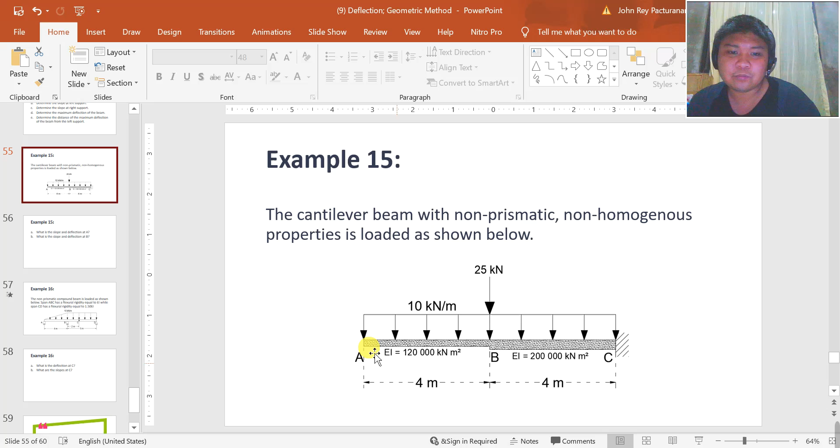So what are the questions here? There are only two questions. Letter A, what is the slope and deflection at point A, which is the free end of the beam? And letter B, what is the slope and deflection at B?

So let's begin discussing the solution. Here in OneNote, I already solved this one because if I don't have a prepared solution, this video might take a while. However, I am trying my best to discuss it in a way that you can understand it even though the solution is already presented.

So the first thing we'll do here, if you remember, we already solved this problem using the moment area theorem - that was example number 8. Last time, we modified the moment diagram because we have different flexural rigidity. So actually, we will do the same thing here.

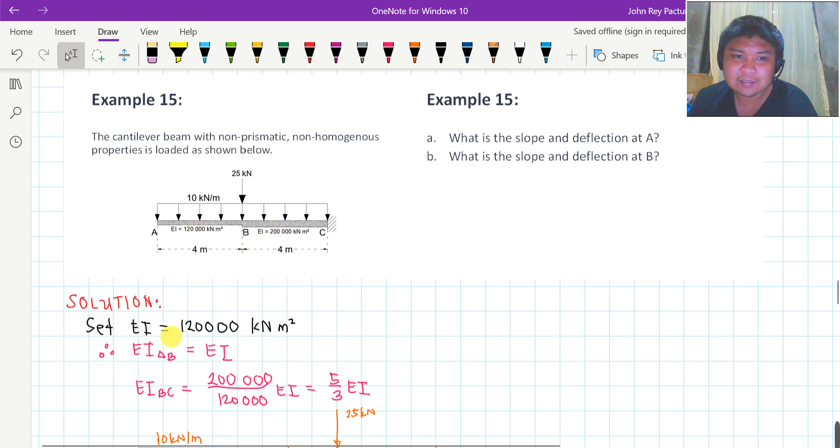So set EI equals 120,000. Therefore, for AB, since its EI is 120,000, the EI of AB is simply EI. However, for the case of BC, it has a flexural rigidity of 200,000. So therefore, the flexural rigidity EI of BC is 200,000 over 120,000 EI, or simply 5 over 3 EI.

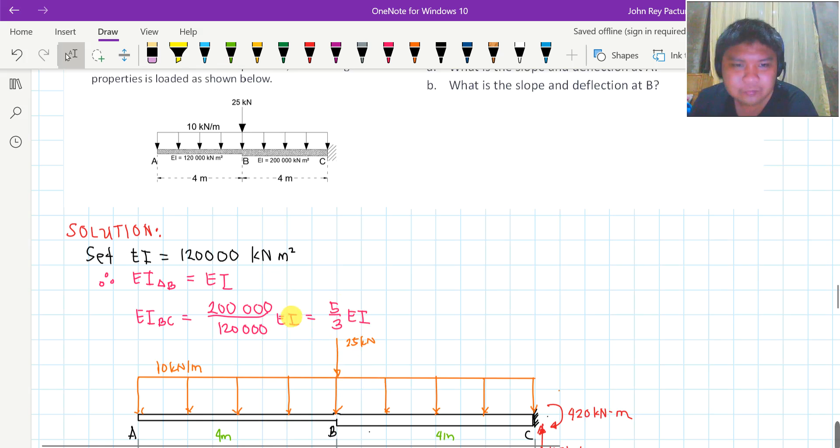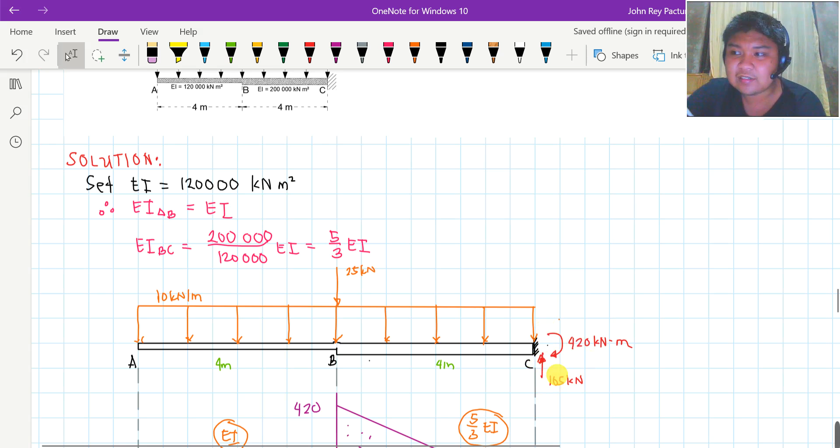Next, this is our original beam. I already computed the reactions - we have 105 kN here and 420 kN meter there. So what will happen here, let's draw first the moment diagram by parts.

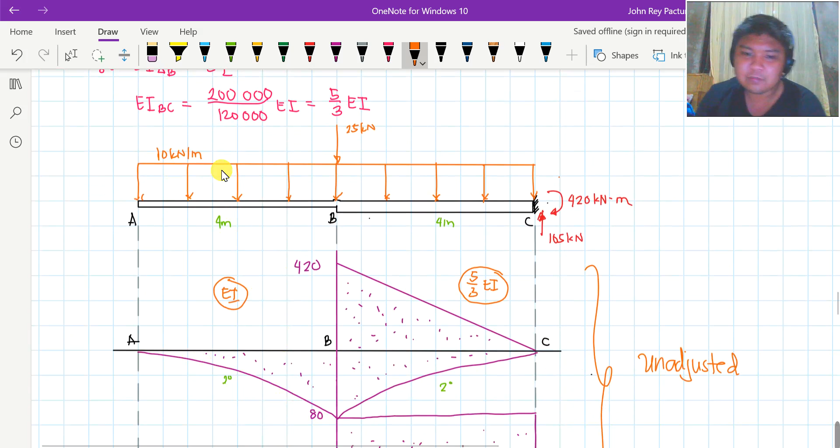So this will be a second degree curve because of the distributed load. If you want to verify that it's 80, that is simply 10 times 4, multiplied by 1/2 of 4. So that is 80, second degree. By the way, I'm not placing a negative sign on this because we're discussing the conjugate beam method.

Next to be considered is the 105 kN force. So 105 times 4 equals 420, and this will become a triangle or first degree curve. I forgot to place the degree label for this, but it's understood that it's first degree.

For this distributed load again, of course, 10 times 4 then 1/2 of 4 again. So that's 80 again. And lastly, for this moment reaction, I won't repeat it - this is a negative moment because it's to the right of B and at the same time it's clockwise.

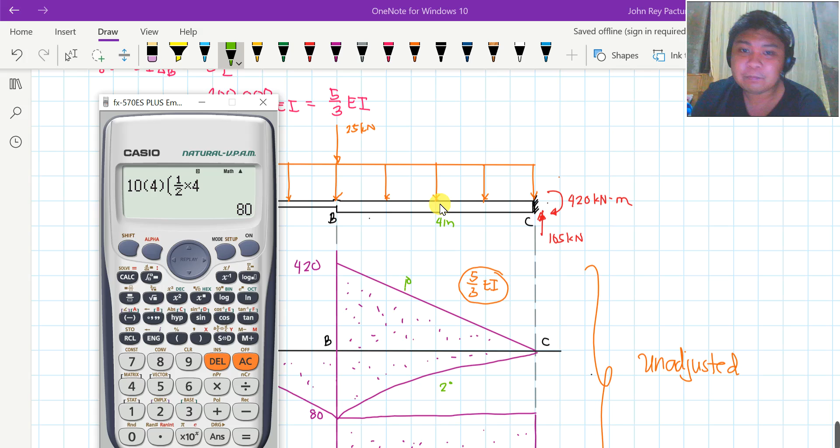Please refer to the first videos in the playlist to understand how moments become positive or negative, class. Okay, we've sketched it already. But let me repeat, this is just unadjusted for now.

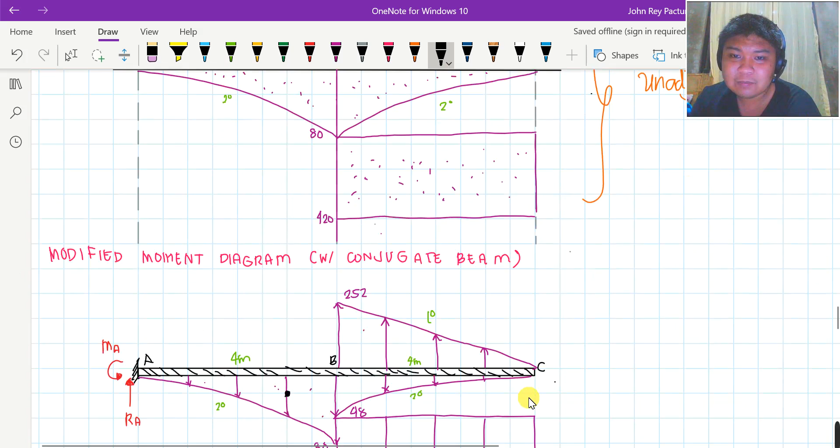And the areas of this moment diagram automatically become the loading. But since A to B has flexural rigidity of simply EI, there's no need to divide, because 80 divided by 1, the coefficient, is simply 80. So when I draw that, it's still 80.

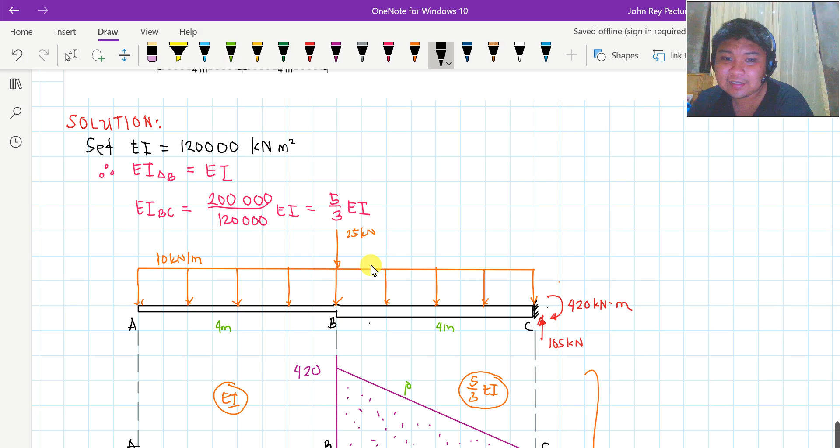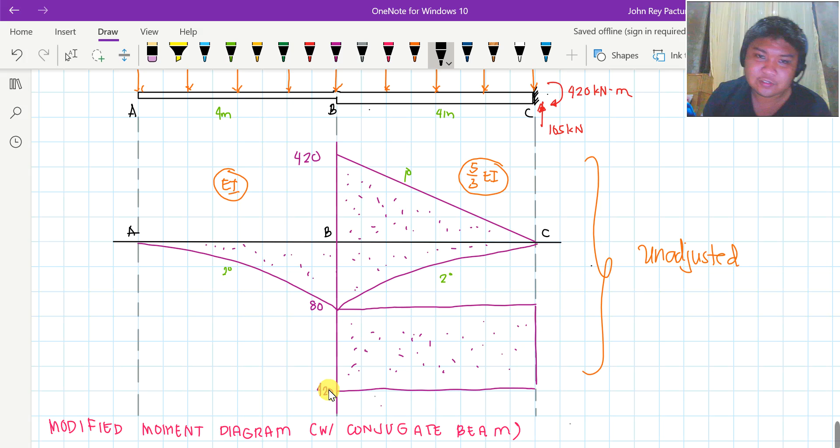However, things started to be different here, class, on the right side, because its flexural rigidity is 5/3 of EI. So what we do is take this 420, and this 80, and this 420, and divide by 5/3. For example, this 420 height of the triangle, divide by 5/3, automatically becomes 252.

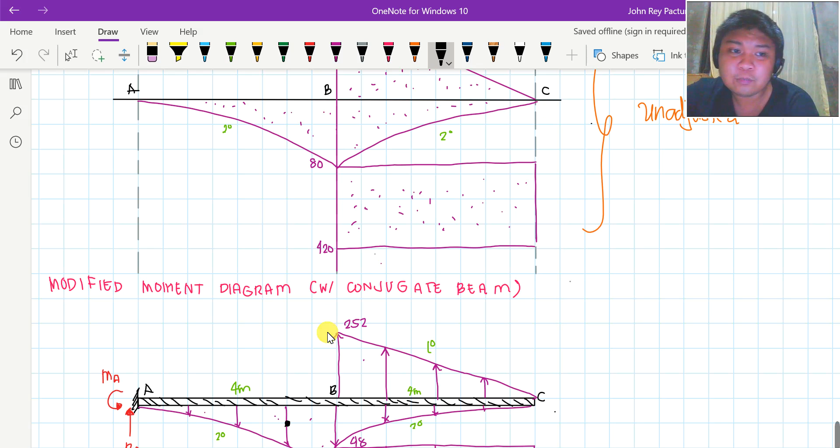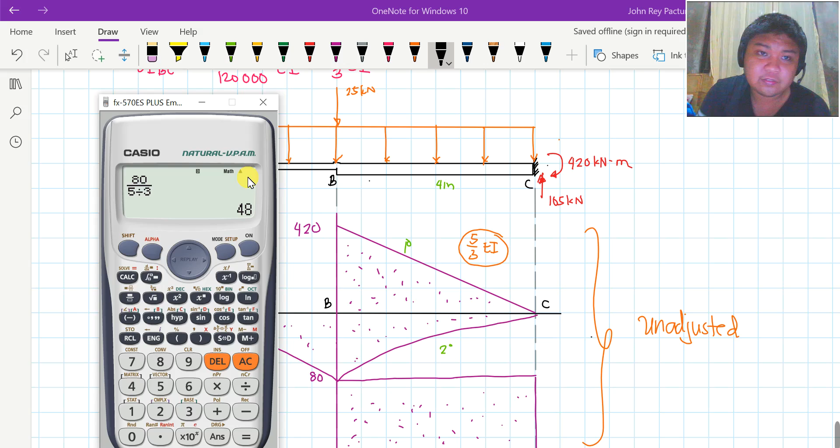Next, for this spandrel of the parabola, do the same thing: 80 divided by 5/3, so the answer will be 48. We need to check that. So this becomes 48. And lastly, this 420 divided by 5/3 is 252.

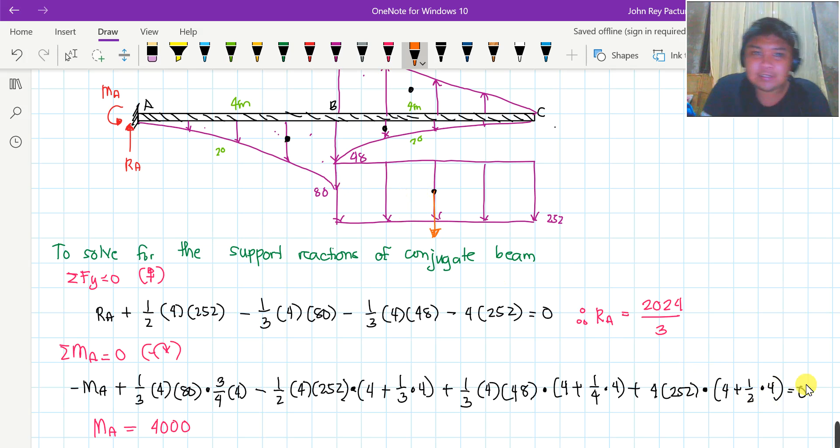Then equate it into 0 kasi nga yan naman ang concept ng equilibrium class. So equal 0, and kapag sinolve mo yung moment at A natin, this will be 4,000. So therefore class, since parehas positive ito, ibig sabihin sa pagkakataong ito, tama na yung aking mga assumed directions.

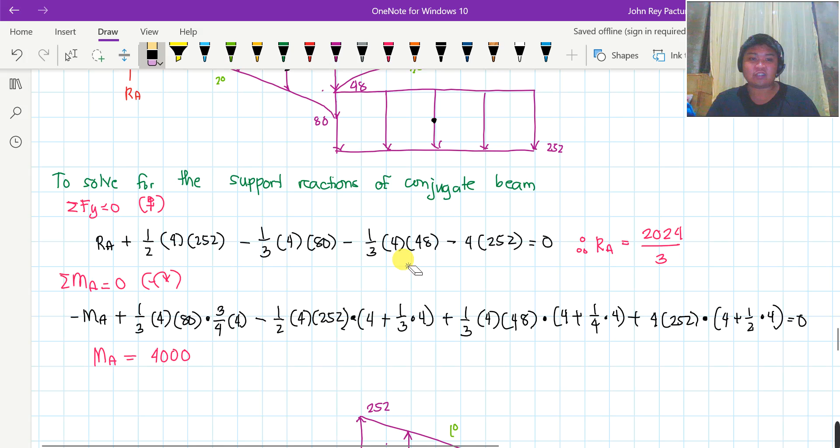So kapag sinulat natin yan, ito na yun class. Ito na yung ating conjugate beam. Ulitin ko, conjugate beam ito.

So sa pagkakataong ito, sagutan na natin class yung mga tanong kasi once na na-establish nyo na yung conjugate beam, magiging madali na class ang analysis. So ano ba yung unang tanong? Balikan natin. What is the slope and deflection at A? So yung point A is nandito.

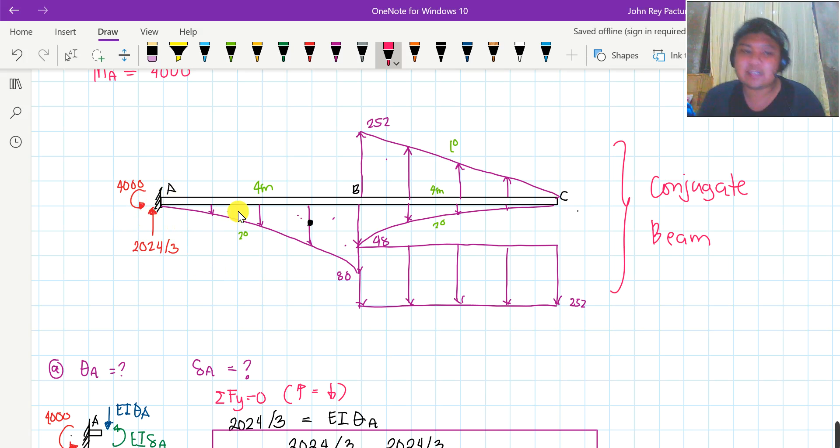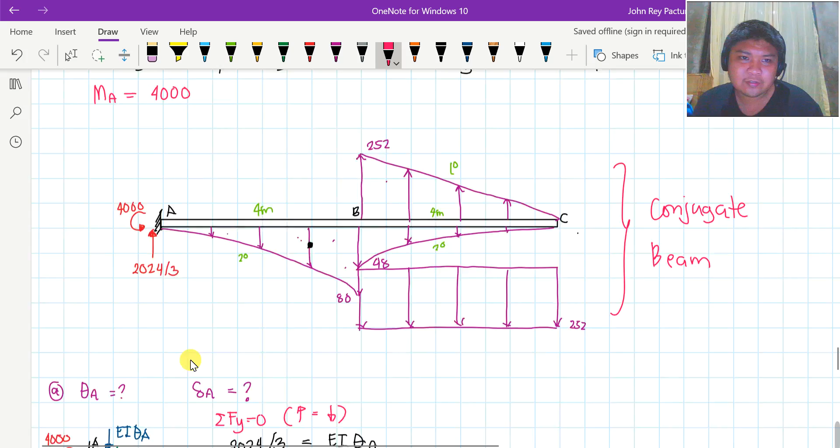Itang tandaan nyo, kapag ang mga kinoconsider natin class ay mga support mismo o yung pinakadulong bahagi, diba? Yung talaga end part ng ating span, mag-cut ka lang ng maliit. Ito lang, katulad nito. So this is the third time that I did this right.

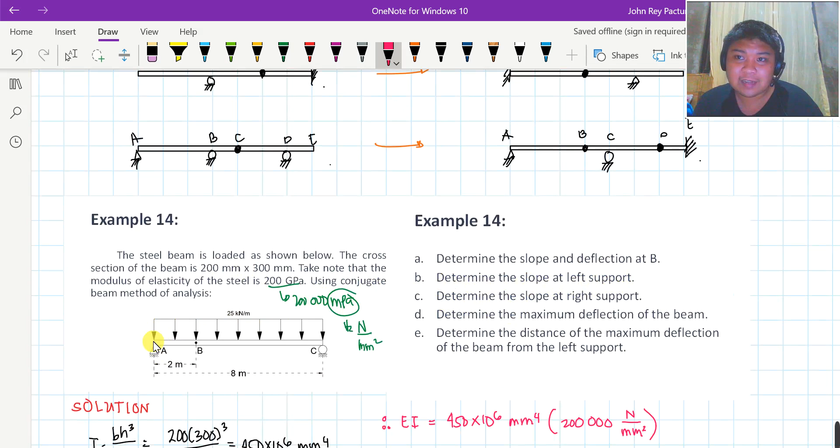Kasi kung maalala nyo, in the previous video, no, ito yung tanong for letter B, what is the slope at the left support? Yung left support at the same time is the left end kasi yun yung dulo. And yung right support as well is the right end. So kung mapapansin nyo, when I solve that, no, nag-cut lang ako ng maliit na segment.

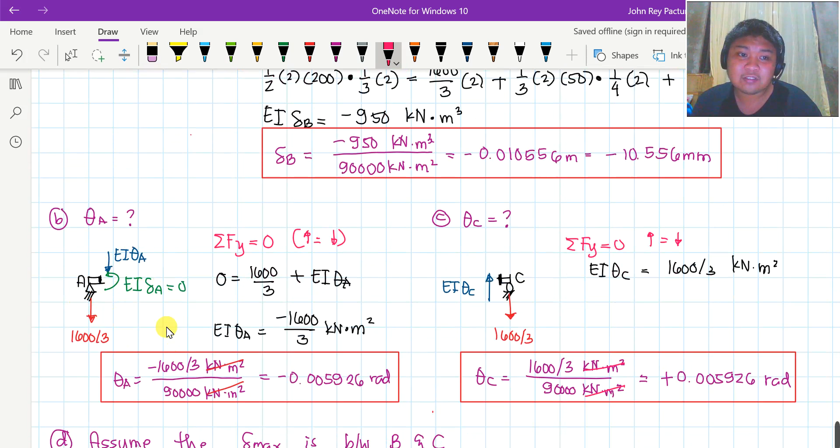Parang representation. And since sa kaliwa yung cut, gagamitin ko yung orientation of positive shear and positive moment sa kaliwa. Sa C naman, since nasa kanan siya, I just cut a small segment. So basta tandaan nyo to, kapag ang kino-consider natin is yung pinakadulong bahagi ng ating beam, just cut a small segment and activate the orientation of positive shear and positive moment depende kung saan ang cut.

Kung sa kaliwa, ito ang orientation ng positive shear and positive moment. Otherwise, kung sa kanan ang pinili mo, this will be the orientation as well. So I hope wala na ditong nalilito. Dito, normally nalilito yung ibang estudyante kapag sa dulo.

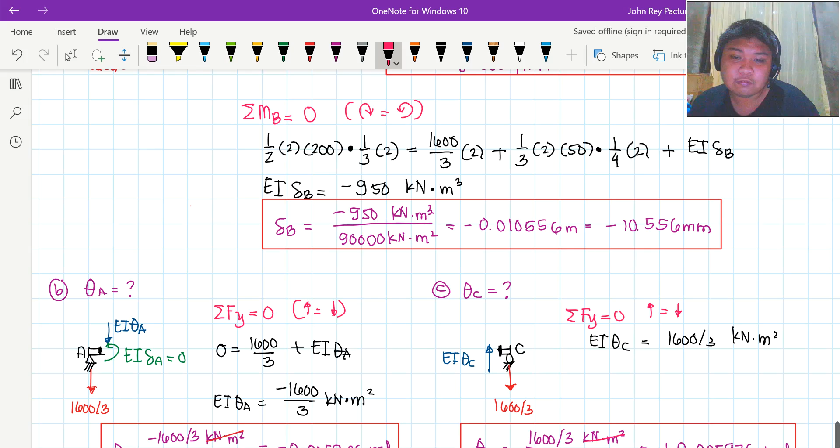So this time, balik ako dito sa problem natin. Yung point A mo ay nasa dulo, right? So mag-cut ka lang ng segment, tapos ilagay mo lang yung ating mga reactions. Ayan na siya, ito na yung point A natin. Nandito na class yung ating mga reactions: upward na 2024 over 3, at counterclockwise na 4,000.

Since ang pinili natin ay kaliwa, this will be the left one, nasa left. So left cut siya. Therefore, ang orientation dapat ng shear ay pababa and ang moment ay counterclockwise.

However, instead of writing that as shear, isinulat ko na lang yan as EI theta A, kasi ang shear sa conjugate beam is equal to the slope sa real beam, and ang moment sa conjugate beam is equal to the deflection sa real beam. So sana nagkakalinawan tayo dito.

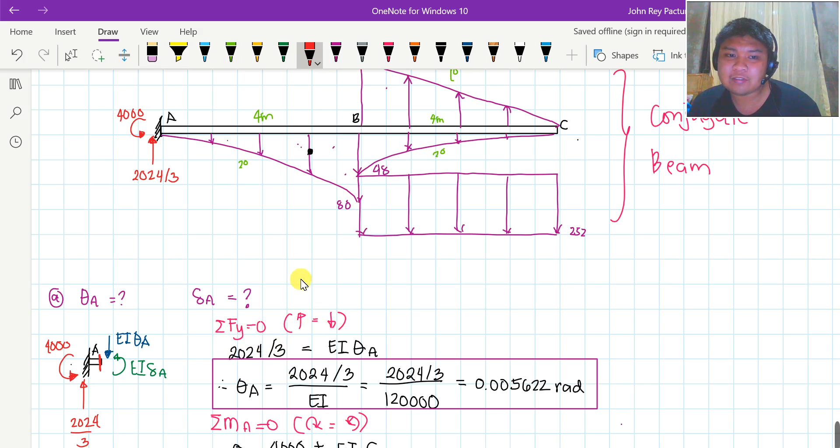Para mahanap natin yung EI theta A, all you need to do is summation of forces vertical equals 0, upward equals downward. Upward itong 2024 over 3, downward itong EI theta A. Therefore, ang theta A natin, class, ay positive 2024 over 3. All you need to do is divide this by EI.

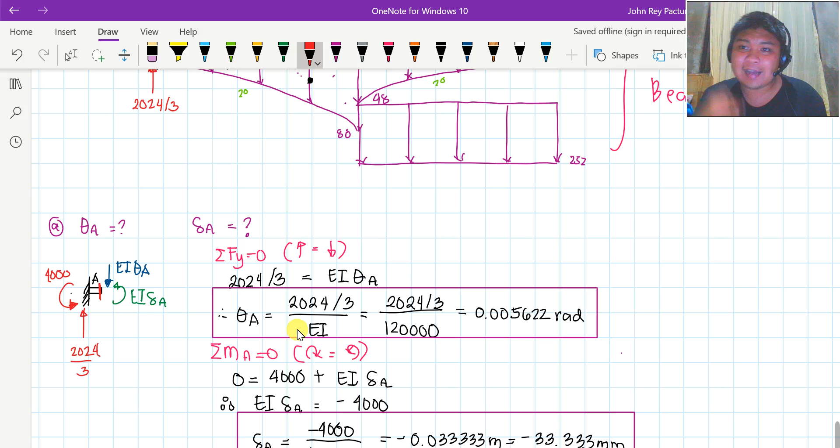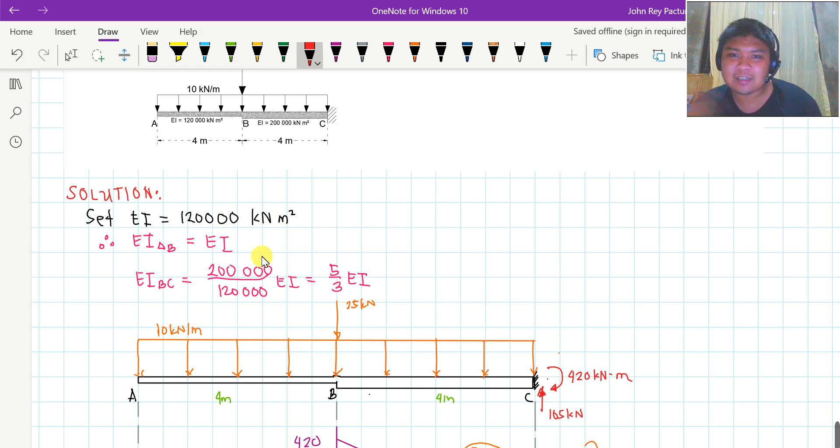Dito, may nagkakalituhan pa. Sir, anong gagamitin, 120,000 or 200,000? Eh diba, in the first place, in-adjust na natin yon. Kaya nga nilagay ko dito, set EI equals 120,000. Ang point ko dito, kapag geometric method, both area moment and conjugate beam, kapag sinet mo yung EI as 120,000, sa lahat ng solutions mo, 120,000 agad. Wala nang ibang value ang gagamitin mo.

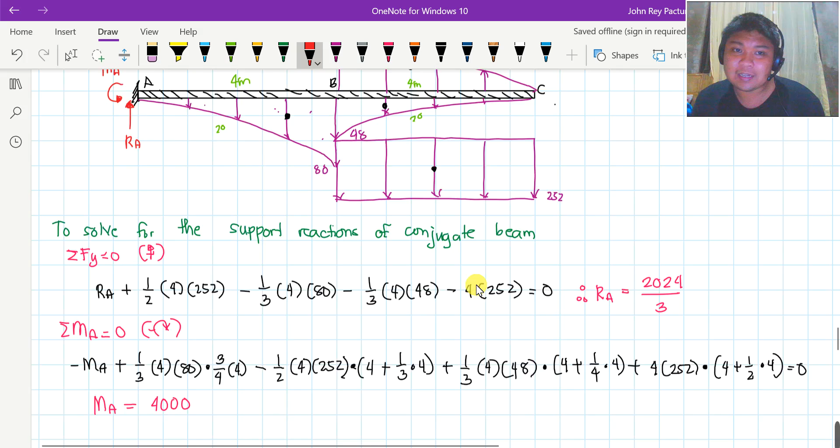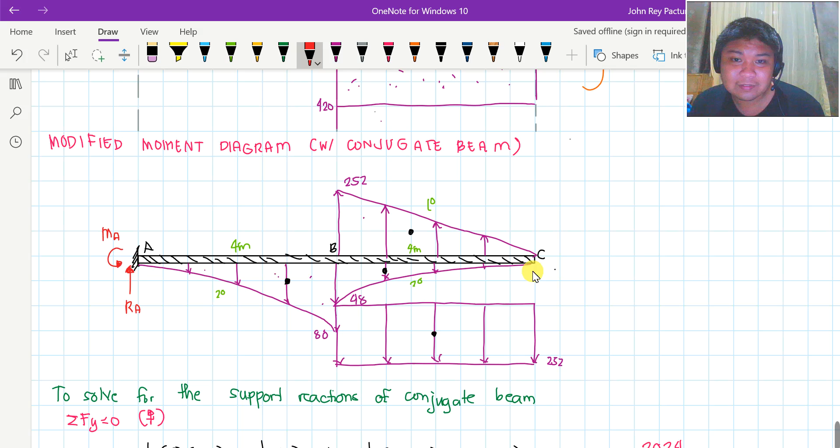Kasi kaya nga ito hinanap ko yung coefficient, para i-adjust ko yung ating mga heights nitong ating moment diagram, para ang maging assumption, class, ay prismatic na to, maging 120,000 na to all throughout. Kung isinet mong 120,000 na dito, dapat ang i-divide mo, class, na EI ay 120,000. Hindi lang yan sa point A, hindi lang yan sa point B.

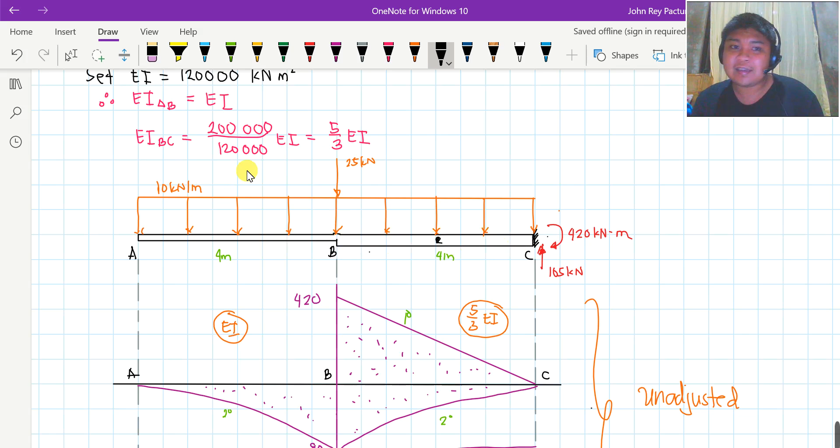Halimbawa, hahanapin ko class, ito yung original beam. Hahanapin ko yung slope and deflection dito sa point na ito, between B and C. Using this diagram, kahit alam kong 200,000 ang nandito, hindi mo gagamitin yung 200,000. Dapat ang gamitin mo nga ay 120,000. Bakit? Because of the modification, ang ginawa natin, in-assume na natin na all throughout the span of this conjugate beam, 120,000 na siya.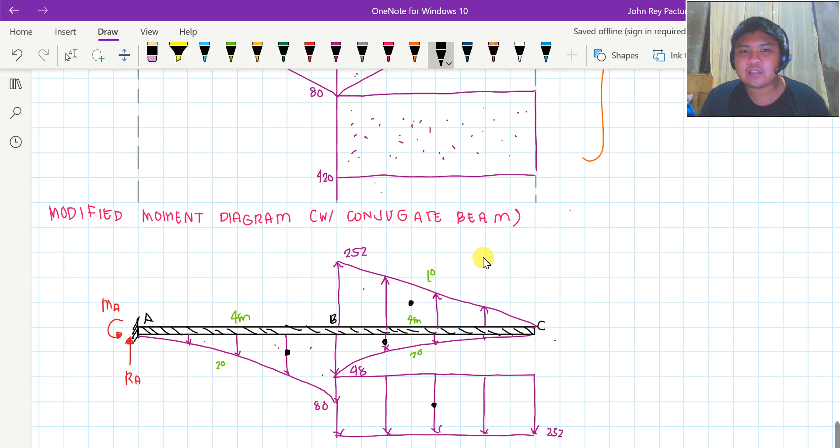So sana wala doon nalilito. After modification, dapat kung ano yung initial na sinet mo na value ng EI, yun palagi ang gagamitin mo, kahit saan point ng beam. Okay? Sige, balik tayo sa solution.

Ito na siya, so ang magiging slope niya ay positive. By the way, 2024 over 3 divided by 120,000, ang magiging slope niya ay 0.005622 radian siya. Alam niyo naman na makaka-cancel out din lang naman yon.

Okay, so yung slope, yung deflection naman at A, kaya summation moment at A equals 0. Clockwise moment equals counterclockwise, so this will be 0 equals 4,000 plus EI deflection at A. Kaya ang EI deflection at A natin ay negative 4,000. So to determine the deflection itself, divide mo lang ulit ng 120,000. This will be negative 0.033333 meters, or simply negative 33.33 millimeters.

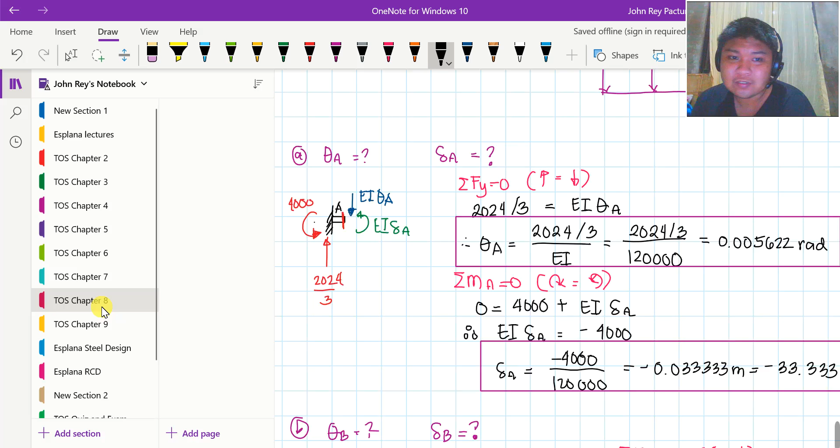Gusto kong balikan natin, class, yung solution natin using the double integration method dito. Actually, pwede mo rin balikan yung moment area method nito. Nasaan siya? I think, wait, ito siya class, so sa summary niya, medyo naglalag lang, no?

Sandali lang. O ito, so yung maximum deflection nga, diba, sa free end yan. So the deflection at A is negative 33.333. At the same time, class, yung slope at A is 0.005622 radian. So tama ba siya?

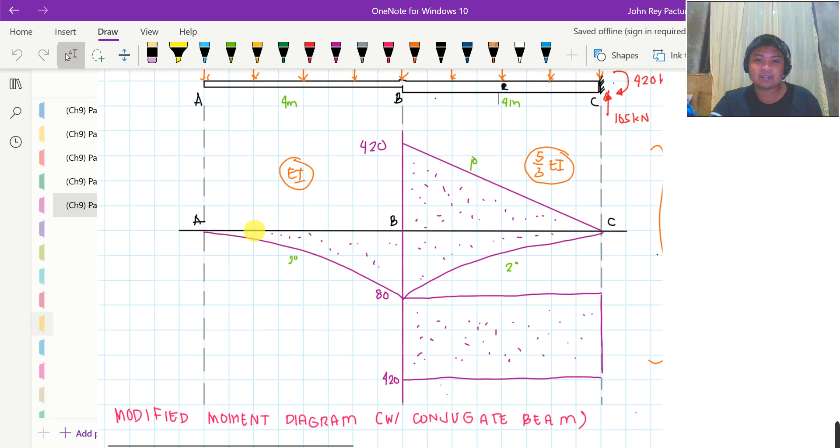Balikan natin for chapter 9. Pasensya na, no, medyo naglalag. So, tama siya, parehas na parehas siya, class, no?

So I hope malinaw dito. Next, dalawa lang naman yung tanong dito, class. For example, number 15, what is the slope and deflection at B? Ngayon ang gagawin mo lang, since ang tinatanong, class, ay yung slope and deflection dito sa B, ikakat mo itong ating beam sa point B.

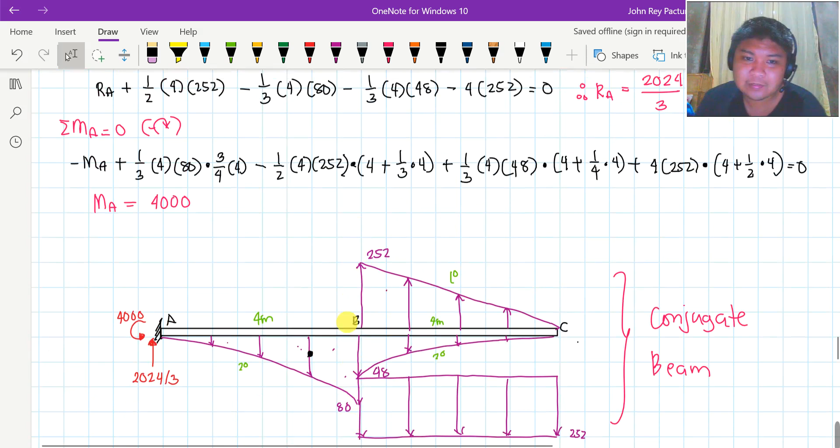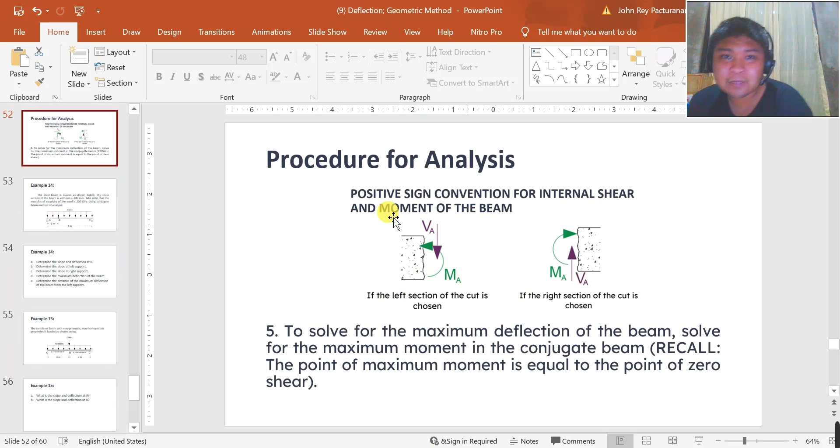Tapos bahala ka na lang na pumili kung kaliwa ba o kanan. Anyway, parehas naman sila, class, madali, no, as far as the diagram is concerned. Pero siguro ako, kaliwa na lang ang pipiliin ko. Tapos, since kaliwa ang pinili mo, class, na segment, always choose this left part. Ulitin ko lang, may diskarte ka, pwedeng itong left, pwedeng itong right, bahala ka na doon. So this time, dito tayo sa slope and deflection at B. Kaliwa ang aking pipiliin.

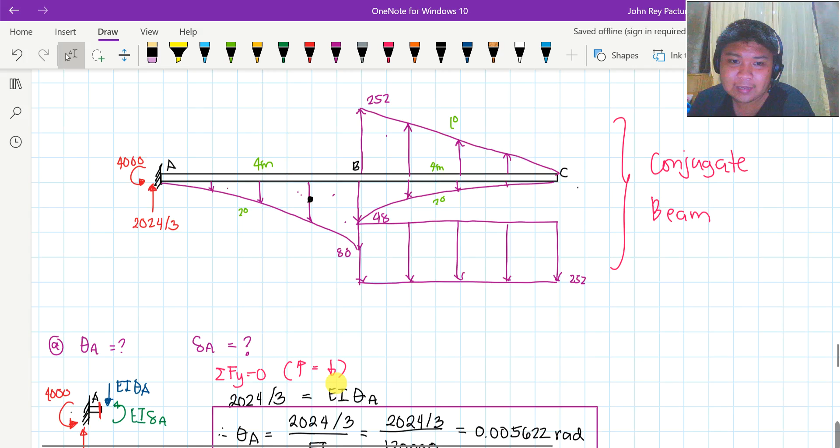So, let's activate the slope and deflection. Sorry, the shear and moment of the conjugate beam. So, 4 meters. Here it is. What we have here is the spandrel of the parabola, then the reactions are already there. So, 2024 over 3, 4,000 here.

So this will be EI theta B, corresponding to the shear at B, and EI deflection at B corresponding to the deflection. So, summation of forces vertical equals 0, upward equals downward. So this will be 2024 over 3 equals 1/3 of 4 times 80 plus EI theta B. So our EI theta B is positive 568.

But we have a value for EI of 120,000. So theta B is 568 over 120,000. So, 0.004733 radian. So this is positive.

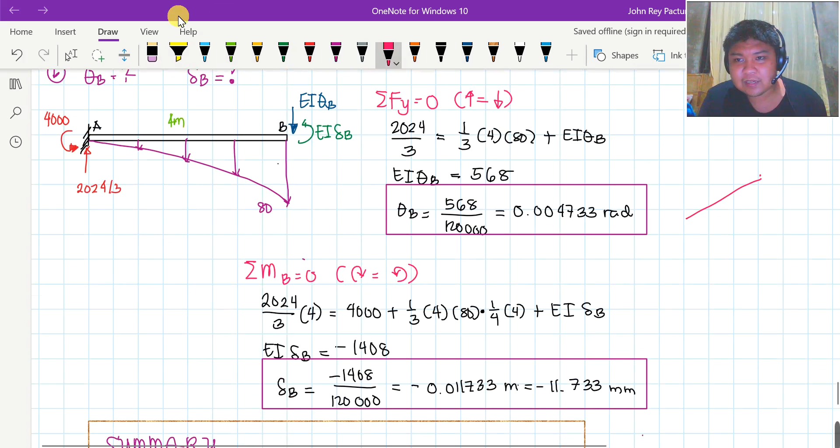Positive, right. On the other hand, to solve for the deflection at B, all we need to do is summation of moment at B equals 0. Clockwise moment equals counterclockwise moment. So what you do is, the clockwise moment at point B, actually there's only one, that's 2024 over 3 times 4. The rest are counterclockwise. So the reaction moment is 4,000 counterclockwise plus this spandrel of 1/3 of 4 times 80.

Its center of gravity is probably located here at 1/4 of 4. This is still a counterclockwise moment. And even EI deflection B is a counterclockwise moment. So, therefore, EI deflection at B is negative 1408.

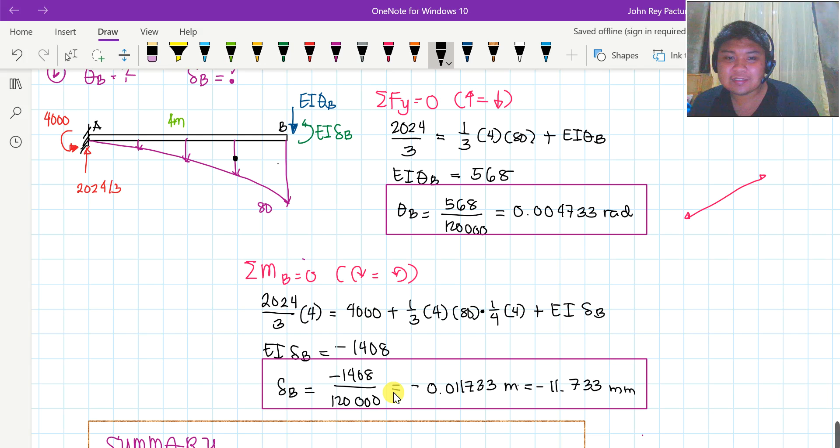And to solve for the actual deflection, what happens is just divide it by 120,000. So what you find is negative 0.011733 meters, or more conveniently in millimeters, negative 11.733 mm. So this will be the deflection at point B. So there, we've solved the two questions.

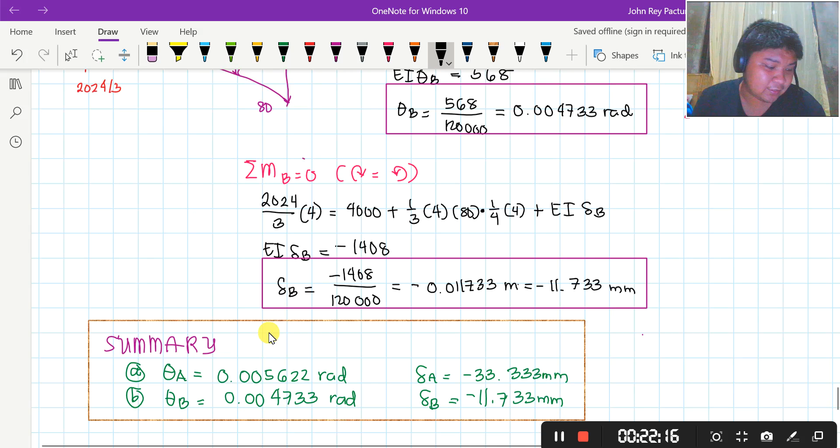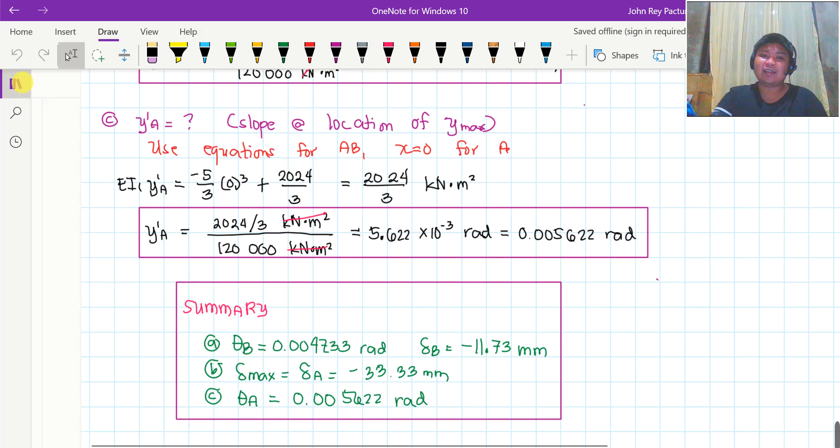So, to summarize, the first question was just the slope and deflection at B. By the way, sorry, I need to check if this also matches with double integration. The slope at B is positive too, so positive 0.004733 radian, and its deflection is negative 11.73. So there, we've finalized it. It's confirmed correct using double integration.

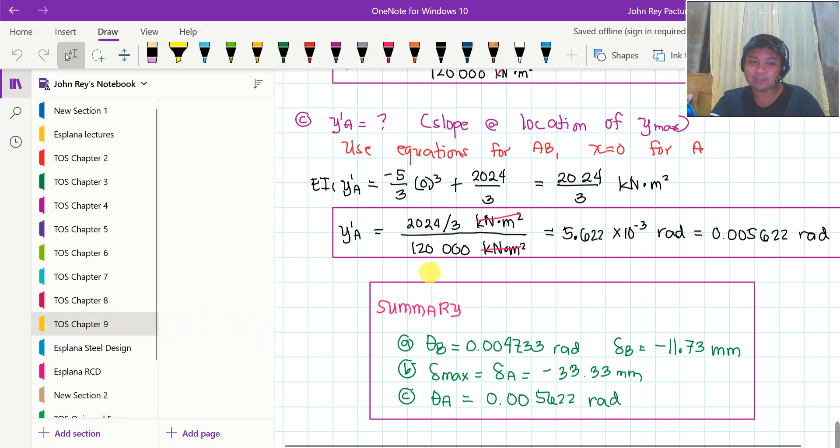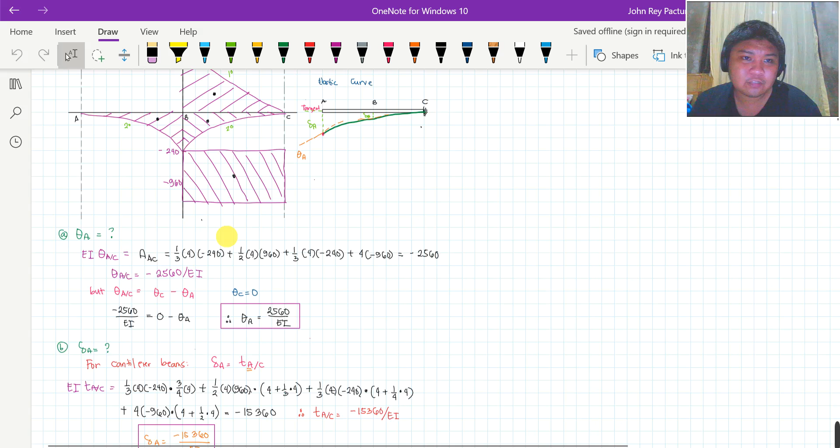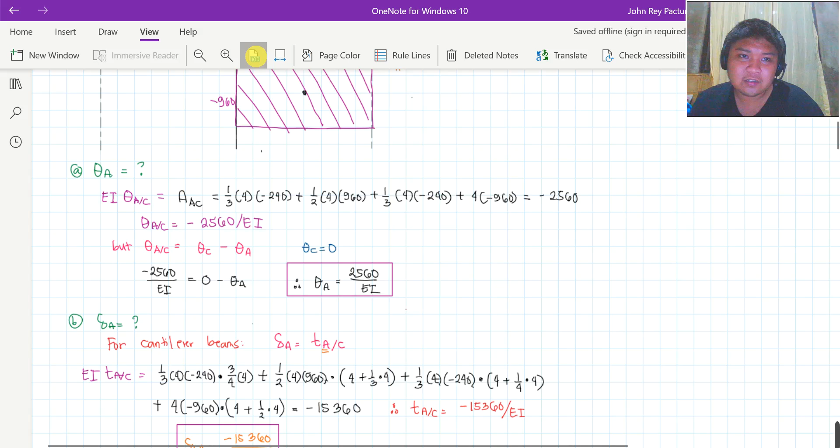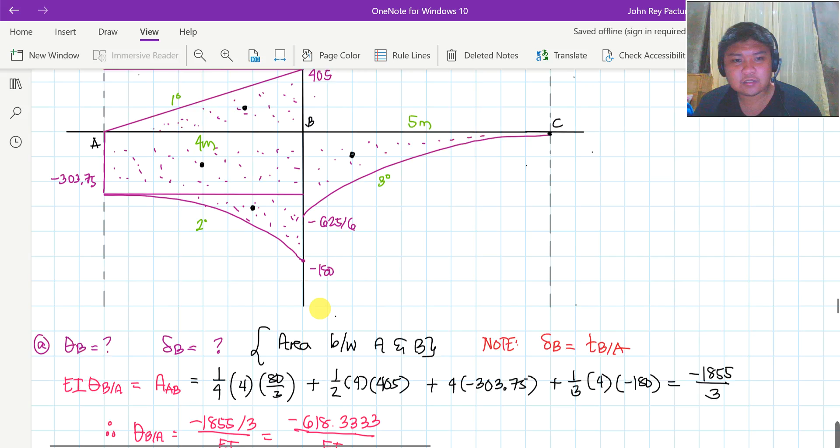This solution using moment area theorem for that problem is also part of this playlist, right? So I think that's video number 9. Let's zoom in. Example number 8 but it's video number 9. I don't think this is it. Wait. Here, oh. This is it.

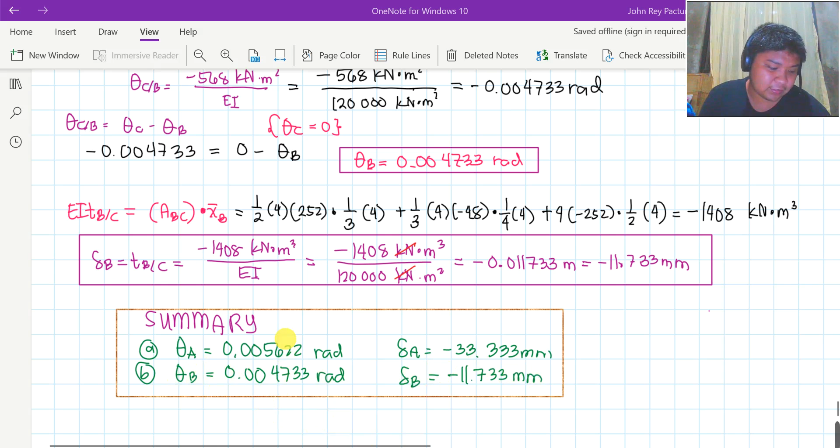My OneNote got compiled with white space. So these are the answers. The slope at A is positive too, 0.005622 radian, and its deflection is negative 33.333 mm, while the slope at B is 0.004733 radian, and the deflection is negative 11.733 mm.

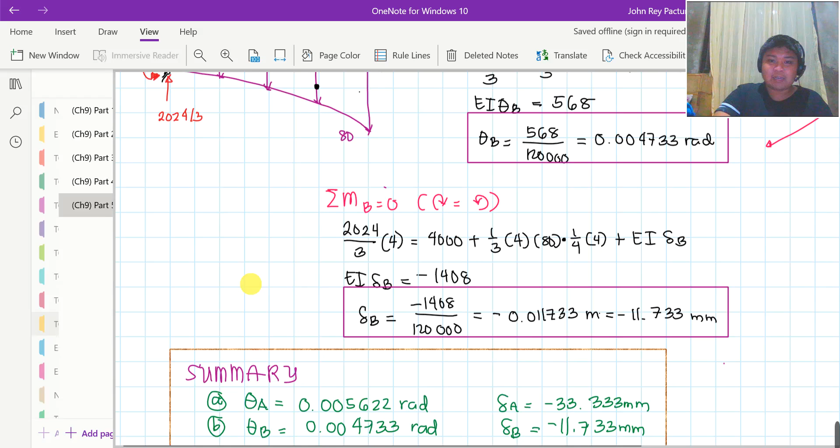So we already used 3 methods for that beam: double integration, moment area method, and conjugate beam. And the answers we got all match, even though this beam is non-prismatic. So, that's really how it is in structural theory: whichever method you use, your final answer should be consistent.

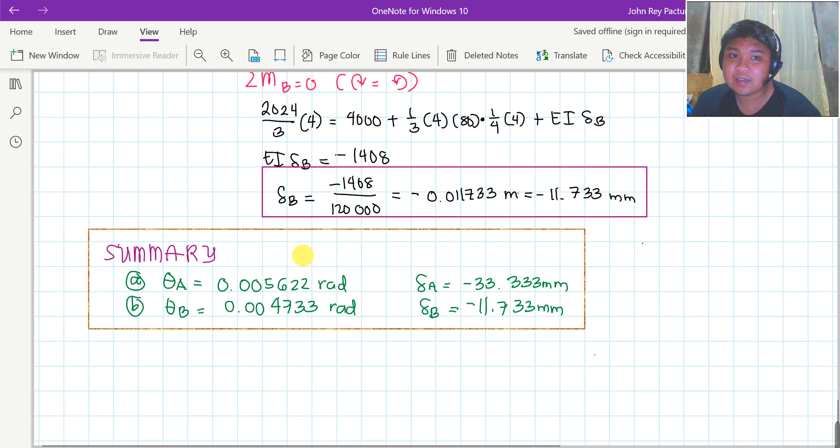So this concludes our discussion for this example. I hope you learned something from this lecture video.